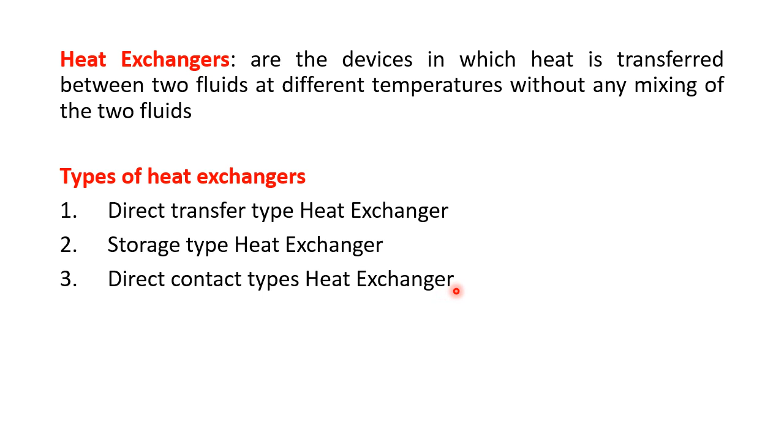So next we will study the types of heat exchangers. Broadly, these heat exchangers are mainly classified into three types. One is direct transfer type heat exchanger. Second one is storage type heat exchanger. Third one is direct contact type heat exchanger. We'll study one by one.

First, we'll study direct transfer type heat exchanger. This direct transfer type heat exchanger is one in which both the hot fluid and the cold fluid flow simultaneously through the device and the heat is transferred through a wall separating the two fluids.

So you can see the sketch here. This is an example of the double pipe concentric tube heat exchanger. Why is it called the double pipe concentric tube heat exchanger? Because one tube is placed in another tube. This is one tube and this tube is placed in the another tube.

So here the hot fluid is flowing at the left end of the heat exchanger and it is moving towards the right, and this hot fluid is exiting at the right end of the heat exchanger. Whereas cold fluid is also entering simultaneously through the annulus of this tube and it is also flowing along the length of the heat exchanger, and this cold fluid is coming out at the exit of the heat exchanger.

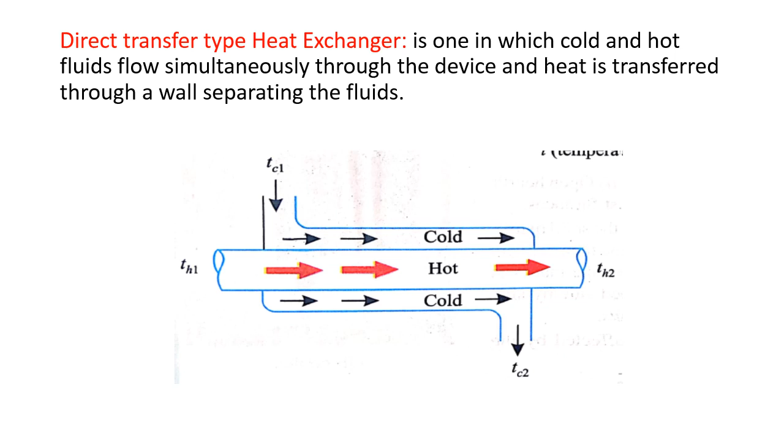So next we will study the storage type heat exchanger. The storage type heat exchanger is one in which the heat transfer from the hot fluid to the cold fluid occurs through the coupling medium in the form of solid matrix. The hot and the cold fluid flow alternately through the matrix, the hot fluid storing heat in it, and the cold fluid extracting heat from it.

So the example for this storage type heat exchanger is single matrix storage type heat exchanger. This is the sketch of the storage type heat exchanger. In this sketch you can see the marks inside. These are nothing but the matrix. It is a porous matrix. This porous matrix may be in the form of bricks with small holes in it, or it may be small loosely filled material pieces.

That means when the fluid is entering the matrix, the fluid should flow through the matrix. There should not be any obstruction. So it is called the porous matrix. So in the process, these are the valves. You can see here, this is the circle with cross marks. These are called the valves.

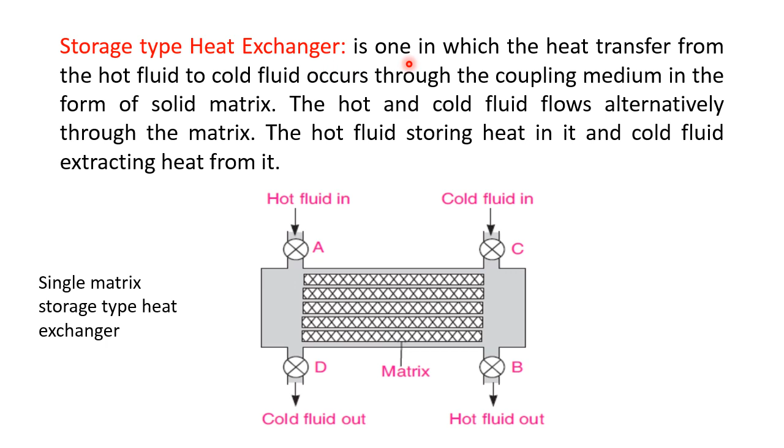So now last one, we will study the direct contact type heat exchanger. It is the one in which the two fluids are not separated.

So in both the previous examples, the two fluids were separated. They are not mixing with each other. But in the direct contact type heat exchanger, these two fluids are mixed with each other. They are not separated. If the heat is to be transferred between a gas and a liquid, either the gas is bubbled in the liquid or the liquid is sprayed in the form of fine droplets into the gas.

So in this example, the liquid is sprayed in the form of fine droplets into the gas. The gas, here we are treating it as air. So this is the best example of the cooling tower, which is used in power plants. It is also used in the cogeneration section in the sugar industries.

So in the cooling tower, the hot water is sprayed at the top in the form of fine droplets. At the bottom of the cooling tower, the cold air is forced to move upward. When the hot droplets of water come in contact with this cool air, heat is transferred from the hot water to the air, and the water gets cooled. After the heat is transferred from the water to the air, the air gets heated up and this warm moist air is taken out at the top.

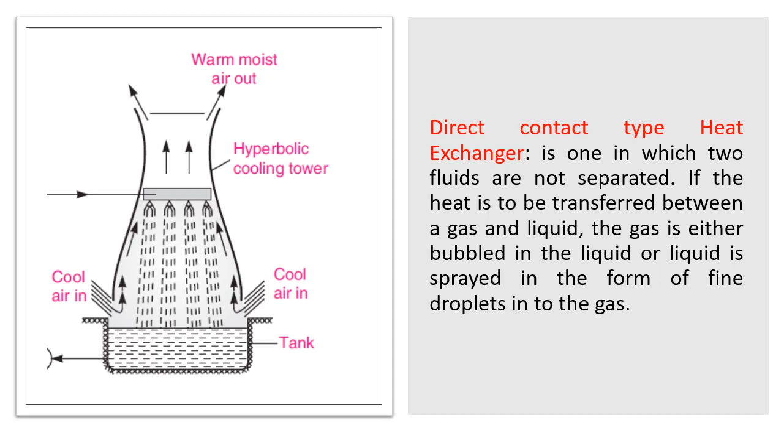So next, we'll study the shell and tube heat exchanger. This is another type of direct transfer type heat exchanger. Direct transfer type heat exchangers are classified into tube heat exchangers and plate heat exchangers, and based on the direction of fluid flow, they are classified as parallel flow, counter flow, and cross flow. We'll study that next. So now we'll study the shell and tube heat exchanger. It is a type of tube heat exchanger which falls under the direct transfer type.

So this is the sketch of the shell and tube heat exchanger. The best example of a shell and tube heat exchanger is the condenser, which is again used in power plants to condense the steam. The main components of the shell and tube heat exchanger are, first, the tubes, where one type of fluid enters, and this is the shell. The entire outside portion of the tubes is called the shell.

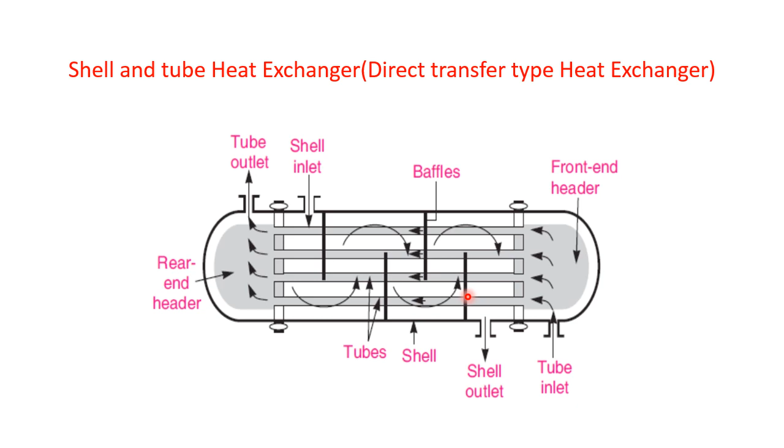So next we will study the different types of direct transfer type heat exchangers, which are classified based on the fluid flow directions. So already I have told you. Based on the fluid flow directions, these direct transfer type heat exchangers are classified as parallel flow heat exchangers, counter flow heat exchangers, and cross flow heat exchangers. So now we'll study one by one.

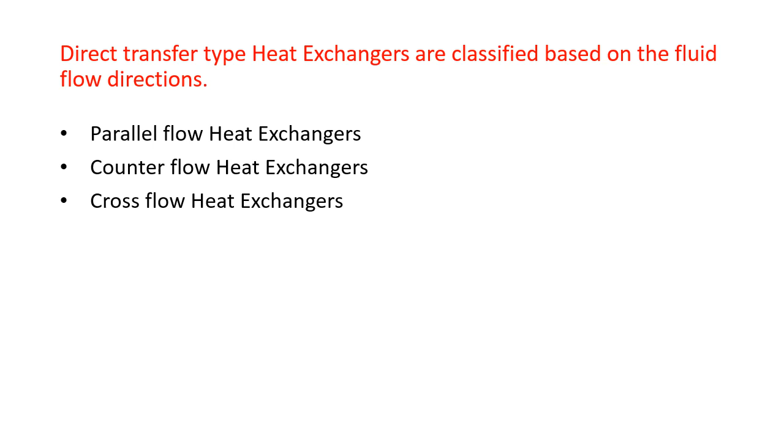So this is the parallel flow heat exchanger. This is also a double pipe concentric tube heat exchanger, because one tube is placed over the another tube. So this is one tube, this is another tube. In the parallel flow heat exchanger, the hot fluid and the cold fluid flow simultaneously in the heat exchanger, and the directions of the hot fluid and the cold fluid are the same.

You can see here the hot fluid is entering the heat exchanger at a temperature of TH1, where T indicates temperature, the subscript H indicates hot fluid, the subscript 1 indicates the inlet of the heat exchanger. The hot fluid is moving along the length of the heat exchanger and moving out here. The temperature of the cold fluid is indicated as TC1, where C indicates cold fluid and 1 indicates the inlet. Here the cold fluid is passing over the annulus of this tube. Both the hot fluid and the cold fluid are flowing parallel to each other and in the same direction.

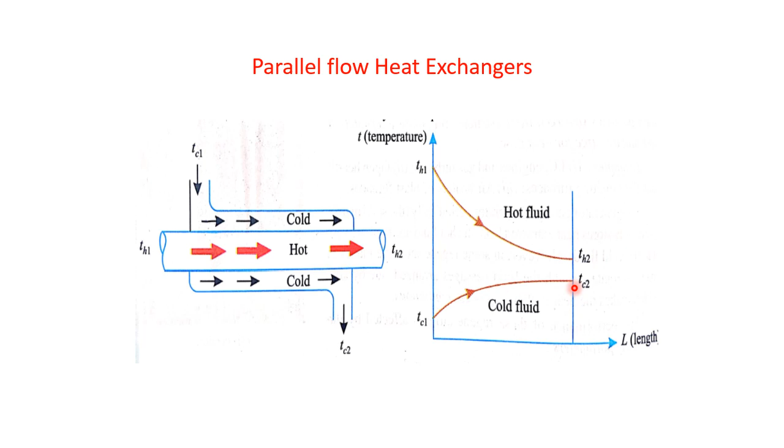Whereas the temperature of the cold fluid goes on increasing when it moves over the length of the heat exchanger, because the cold fluid is receiving heat from the hot fluid. The hot fluid gives up the heat, whereas the cold fluid gains the heat. So as it gains heat, its temperature goes on increasing along the length of the heat exchanger.